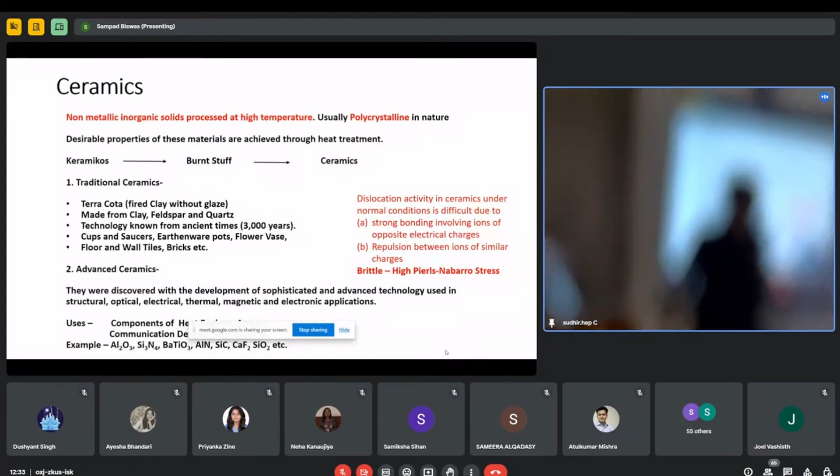So let me first tell those who do not know what ceramics is. I think everybody knows, but basically it is an inorganic material processed at high temperature. Now the definition of ceramics has changed, including carbon compounds like carbon nanotube, graphene, etc. Traditionally ceramics like terracotta were made from clay, feldspar and quartz. Those are traditional ceramics. Its technology is 3,000 years old. It's a very age-old process.

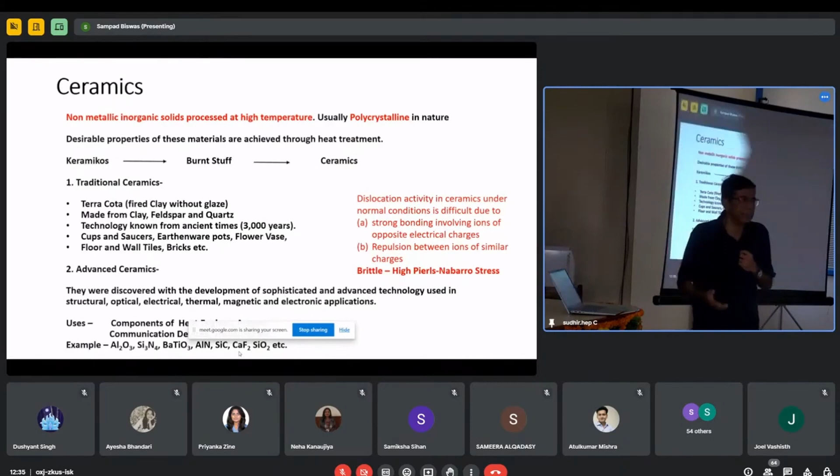But with the advent of modern technologies, you need materials beyond normal conditions. These are called advanced materials, and they are processed by advanced technology. These advanced ceramics are now coming into different applications, one of them is armor. These ceramics are aluminum oxide, silicon nitride, silicon carbide, barium titanate, calcium fluoride, silica. There are a lot of inorganic compounds you can make into ceramics by processing at high temperature.

Now, let us see how ceramics fail. If you take a ceramic and drop it, it will break. Its fracture toughness is very low. You cannot compare the fracture toughness of ceramics with metals or polymers. But even then, when a bullet impacts the ceramic, the bullet fractures. That is the most important thing. The bullet fractures and gets crushed. That is the reason why ceramics are applied in armor.

When the tip of the projectile hits the ceramic, it creates a conical shaped crack. These conical cracks are quite common under impact load and shock wave conditions. Shock waves are generated within the ceramic as well as within the projectile. The sign of the shock waves differs in the ceramic and the projectile, depending on the impedances of the two materials. Impedance means density and the velocity of sound waves within the materials. This is how ceramics fail.

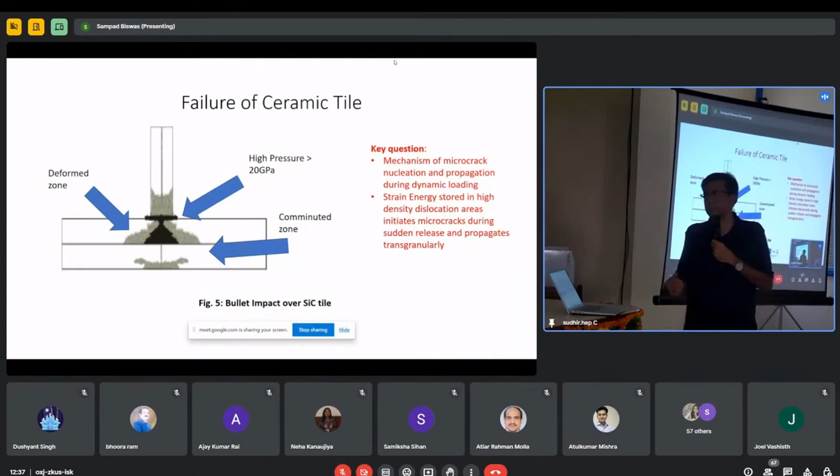Now, in the case of ceramics, aluminum nitride and silicon carbide are the main ones. These are the two main advanced ceramics occupying the state of ceramic armor materials. We have carried out a little bit of work on aluminum nitride.

See, aluminum nitride is a wurtzite crystalline lattice, a hexagonal wurtzite crystalline lattice, and it has very interesting properties. If you apply confinement load in aluminum nitride ceramics, what will you get? You will get a transition of the properties from brittle to ductile.

It's a very new invention, and people have found that when you apply this confinement load and then hit it with a shock wave, you get the transition from brittle to ductile. This brittle to ductile transition takes a lot of energy. It consumes a lot of the energy of the bullet, and it helps to protect against the bullet.

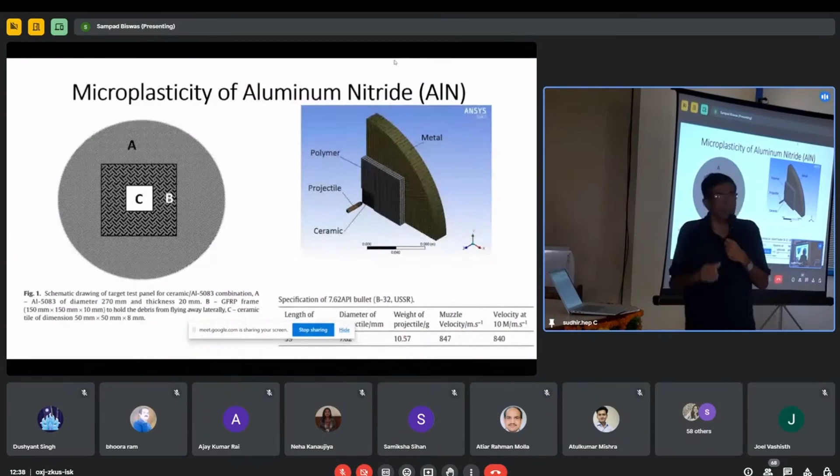So we carried out an experiment with two different ceramics. One is aluminum oxide, the other is aluminum nitride, and we wanted to see how this varies with the chemical composition of the ceramics. So one is AlN, the other one is Al2O3. These two have different crystal structures. One has a rhombohedral crystal structure, the other has a hexagonal crystal structure.

Our projectile was about 10.57 grams in weight, and it hit with a muzzle velocity. With a gunshot, you can change the muzzle velocity by changing the composition of the explosives. By changing the muzzle velocity, it can go up to a maximum of 847, and we did the experiment with the highest muzzle velocity of the projectile, about 847, which happens with AK-47 bullets. So that was our technical interest.

Now this is the target which we took. This target is made up of aluminum alloy A, on which we have placed a fiberglass material surrounding the ceramics. The ceramic is denoted by C. This C portion is hit by the bullet, and later on we modeled it in numerical simulations.

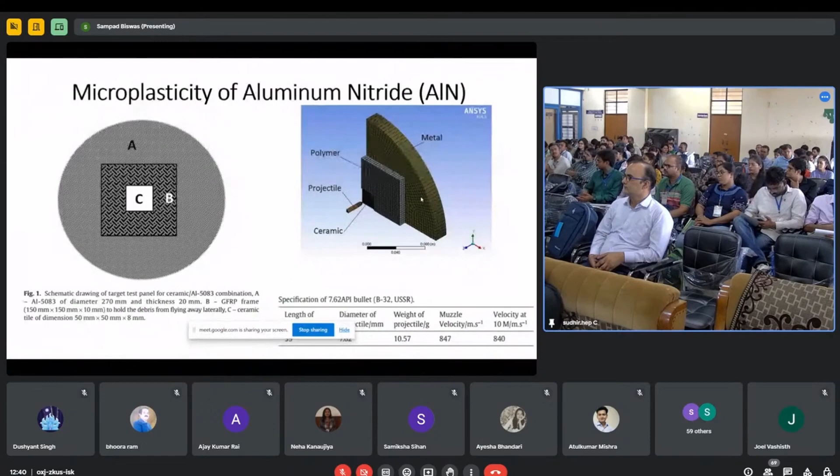Now what I wanted to show you is the projectile velocity: when the projectile hits the ceramics, its velocity gradually goes down. As it goes in, it breaks the ceramics, and at the same time its own velocity is going down. This can be experimentally verified, and it can be simulated as well. So we carried out the simulation work.

Then we looked at the microstructure of the impacted ceramics. As I told you, ceramics are very brittle in nature, due to the high Peierls stress. This brittleness is because ceramics contain dissimilar ions. While metals consist of similar atoms, in a ceramic crystal structure you get dissimilar ions.

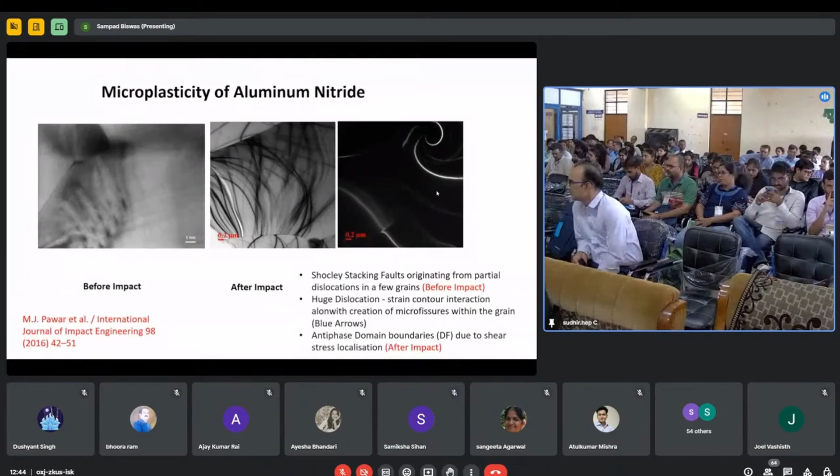You can see clearly the domain boundaries. So this absorbs a lot of energy of the impacted bullet. So this happens in case of aluminum nitride, which is prone to ductility at a considerable confinement pressure.

Next, another important ceramic is silicon carbide. Silicon carbide is a very interesting material, as well as aluminum nitride. It can be applied in a lot of applications. One of them is armor applications. Why is it so? It has got two crystal systems. One is wurtzite, which is hexagonal, and the other one is cubic, that is the sphalerite structure.

Now, in case of inorganic materials, what happens? You cannot just say hexagonal or cubic. You have to identify an analog for it. So here it is sphalerite, in the cubic lattice, and the other one is wurtzite, in the hexagonal lattice. So these are the two crystal systems of the ceramic. Apart from that, it has got different polytypes also. Polytypes means the stacking of the ceramic is different.

I'll show you later. Before that, I want to tell you that there are 200 polytypes of silicon carbide. The most common polytypes are 2H, 6H, 4H, 15R, and 3C. This 3C symbolizes the cubic form. The 2H, 4H, 6H are hexagonal forms. I'll show you how it happens and what the structures are.

Now, one important thing is that since these are covalent, the diffusivities of silicon and carbon within their lattice are very low. So you have to apply pressure, high temperature, and additives to prepare these polycrystalline materials. Now we are dealing with polycrystalline materials, not single crystal materials.

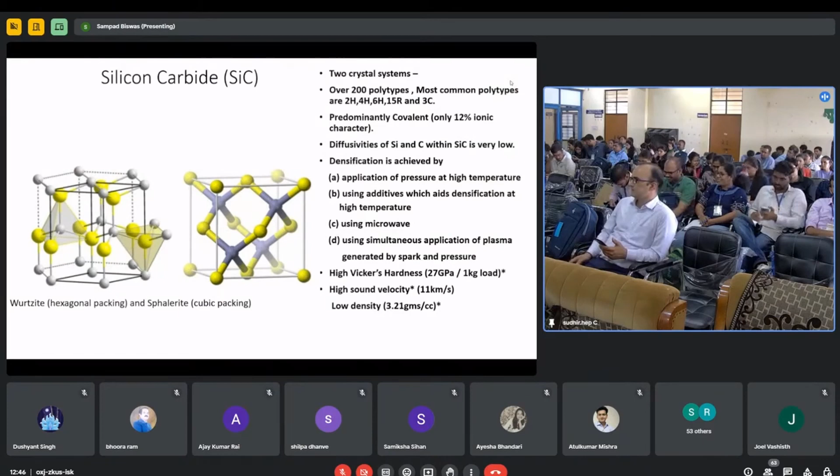So it has got a very high Vickers hardness, about 27 GPa at 1 kg load, and it has got a high sound velocity. That is most important: this high longitudinal velocity as well as transverse velocity within the ceramic. Solids have got much higher sound velocity. That is very important for armor applications. And it has got a low density, about 3.21 grams per cc.

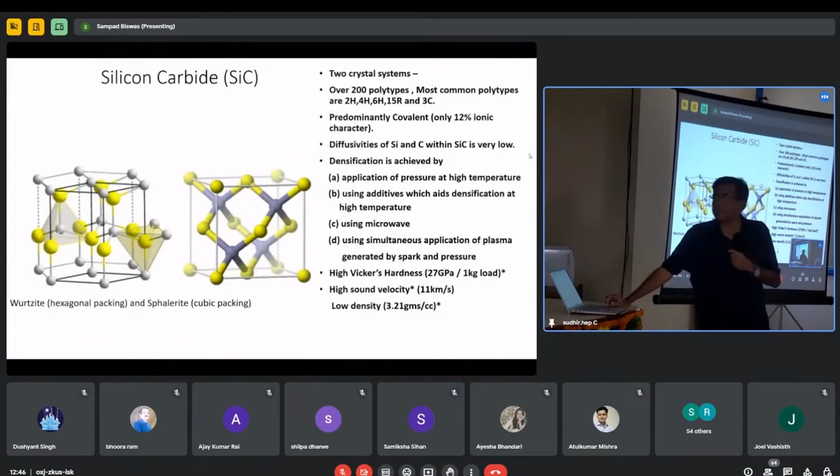Now, regarding the polytypes of silicon carbide, the properties also differ due to the different polytypes. So in these polytypes, what happens? It is the stacking of (111) silicon carbide bilayers, as well as (0001) of the hexagonal bilayer.

It has been found that during processing, you have to add some aluminum, boron or carbon within the material to get it densified to a maximum density, say about 98%, 99% relative density. And you have to add some metal ions like aluminum. What happens? This aluminum goes into the 6H structure, creates faults within the lattice, and converts it to the 4H structure. So this polytypic transformation is very important in silicon carbide ceramics.

So there is existence of Shockley stacking faults, and some have questioned whether the Shockley stacking fault is the only stacking fault, but there are Frank stacking faults also present in this material.

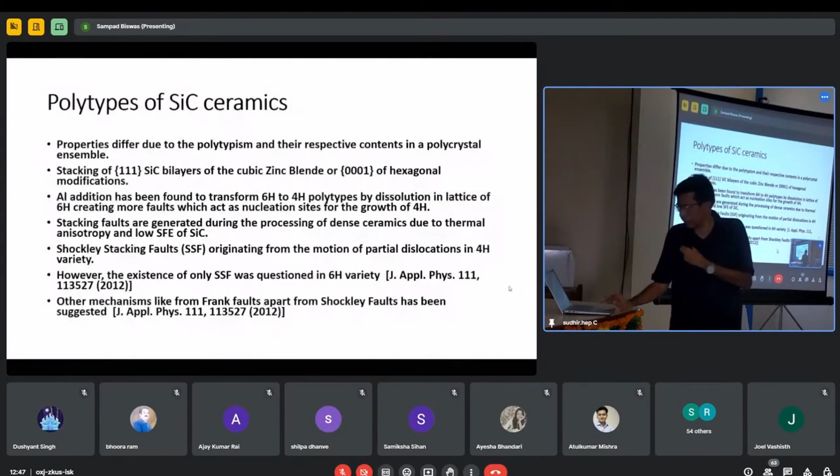Now let us see how the polytype structures are. You can see this is the pure 3C. These are the three stacking layers A, B, C. Then this is the 2H. Then this is the 4H, where you've got four layers. Then 6H, where you have got six layers, and so on and so forth.

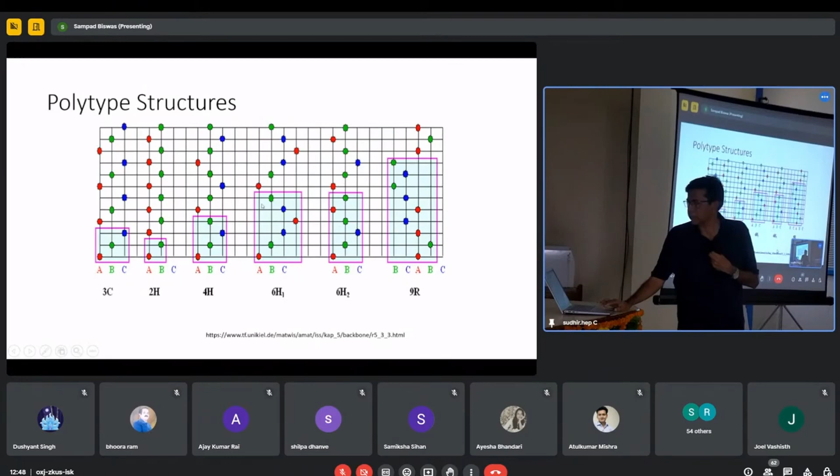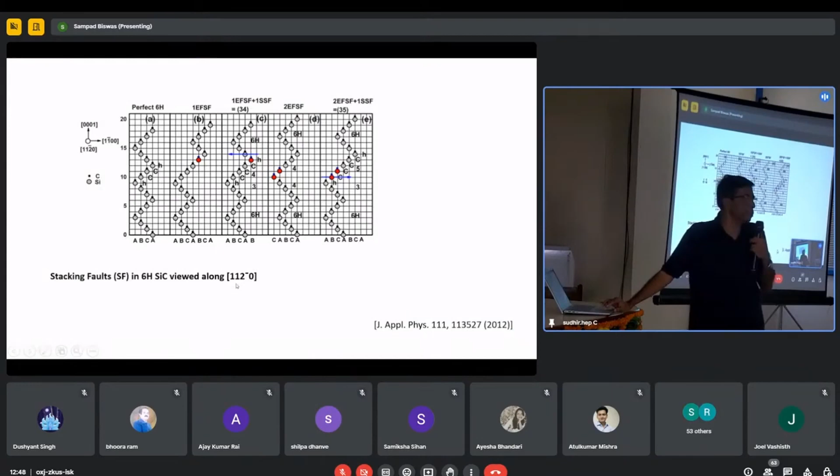Now, these are the stacking faults present in the 2H, 4H, and 6H structures. Here it is a case of 6H structures in the zone axis 1 1 -2 0 and the basal plane. I just wanted to show you how these stacking faults are in silicon carbide.

When we apply shock, as I was telling you, microplasticity appears. Microplasticity means the ceramic becomes more ductile, and this was first reported by some people like Longy.

Then some people have also analyzed the dynamic plasticity of silicon carbide during compressive loading. So these are the previous works I wanted to mention to you. So here what happened is that, lastly, some people have found that amorphization has been taking place. That means when you are hitting it with a bullet, when you are giving it extra shock pressure, crystalline to amorphous phase formation is there, and from there recrystallization also takes place. These were the mechanisms, and some people have observed it. We will also show you how it happened in our case.

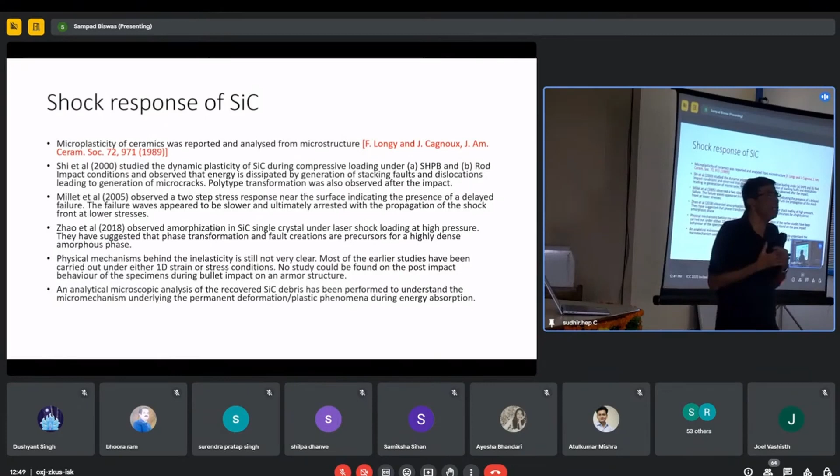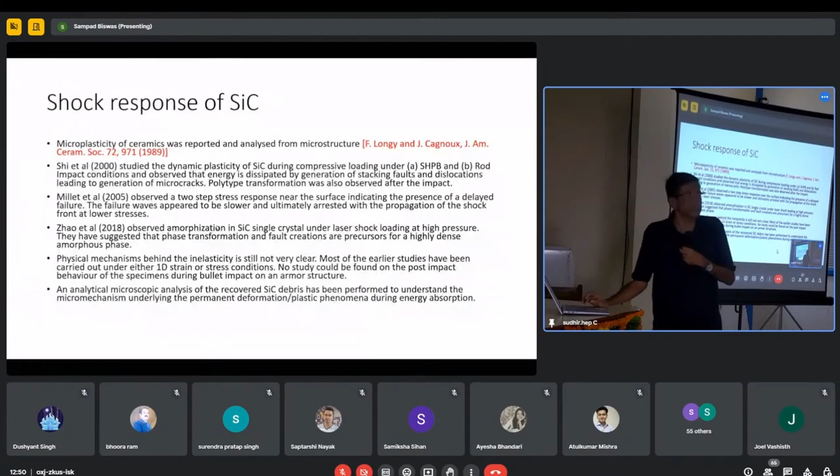So, the physical mechanisms behind the inelasticity are still not very clear. Most of the earlier studies have been carried out under 1D strain or 1D stress conditions, but in the case of actual armor, it is the multi-axial strain which plays a very important role. So we have carried out our experiments with an actual hit of the bullet, recovered the specimen, and then carried out further characterizations. This has not yet been done so far. We have not got any report from anywhere of anyone who has done this.

So we have taken the starting powder. If you look at the composition, you can find the 3C composition is only 5.5. Mostly it is 6H powder. So we have started with the 6H powders. Now, when we prepared the ceramics after sintering or hot pressing, what we have found is that the quantity of 6H is reduced while the quantity of 4H has increased. This is possible through a polytypic transformation from the 6H structure to 4H.

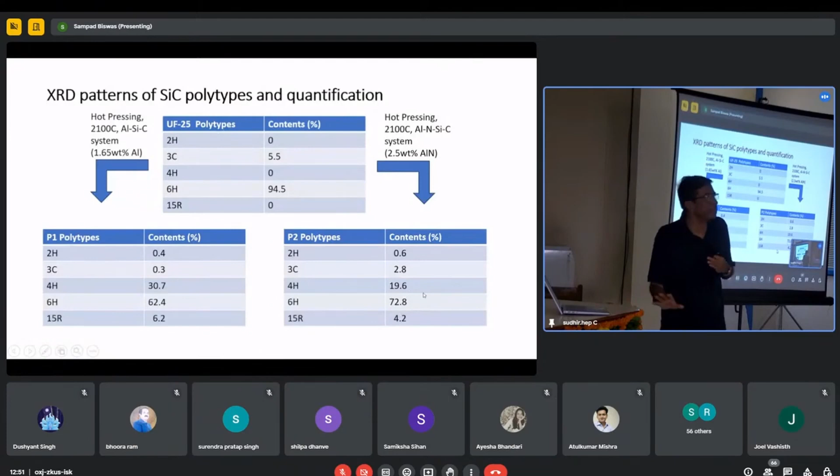And later on, in some cases where you add a different additive, what you find is that your polytype ratios are changed. In this case, you can find in the P2 samples, mostly the 6H variety is maintained, and very little transformation is there to 4H and 3C. This is the original ceramics I am talking about. Then I will show you how it happens after the impact with the bullet.

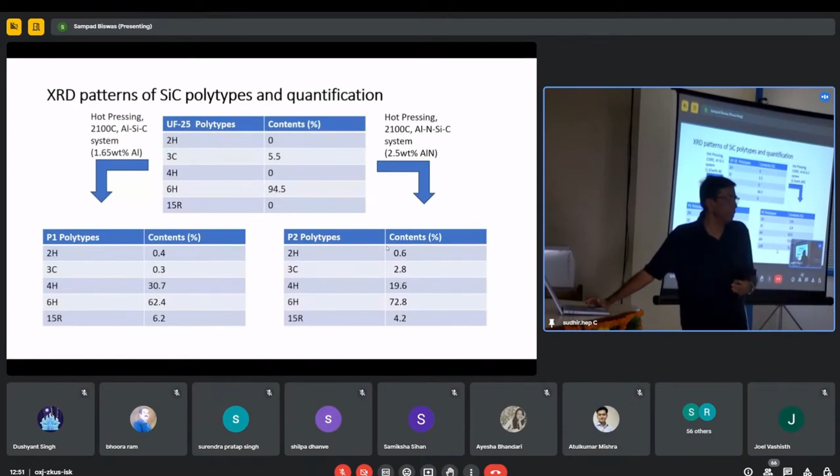Now, inelasticity of ceramics was first studied by planar shock experiments. Planar shock experiments means you apply a planar wave to the ceramics and then follow the response. And these responses are followed by means of a manganin gauge or piezoresistive gauges. And you will find the particle velocity, time, and you get a shock Hugoniot also. So Hugoniot characteristics are very important in the case of armor ceramics.

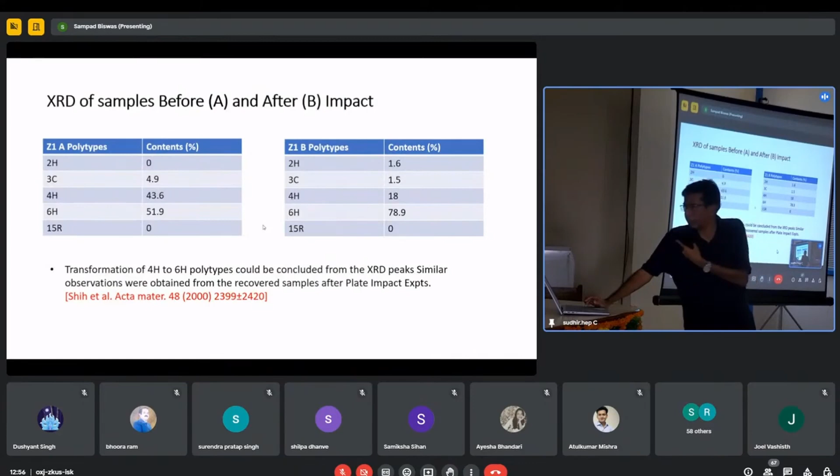And this observation was also made by some people earlier in the year 2000. So this is in case of another variety of silicon carbide. It is not only that, we will find another thing.

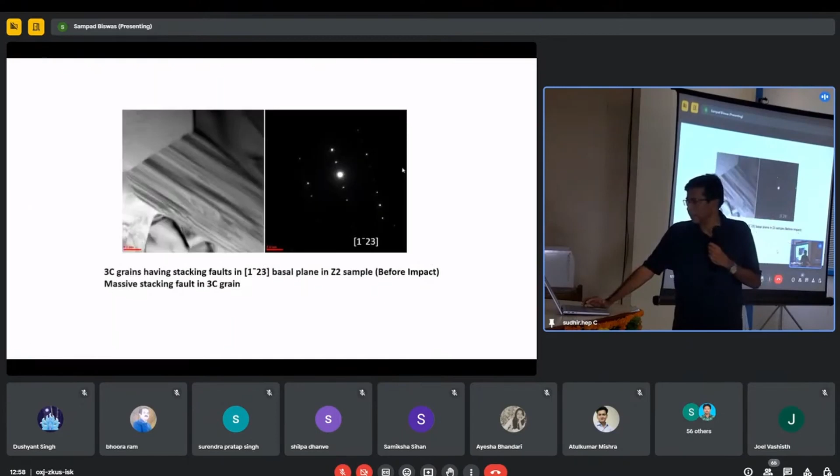What we wanted to say is that a lot of dislocation activity was there during the shock process, while these were in the plasticity region, and these dislocations create defects. See, if you look at it, a typical Shockley defect: one dislocation creating the defect here, another dislocation creating another stacking fault here, a third dislocation creating the third stacking fault here. This is a typical Shockley defect created by the dislocation and by the shear stresses applied to this material during the shocking.

So, the conclusion is that microplasticity with defect creation could be observed in the grains of both aluminum nitride and silicon carbide. Mainly Shockley stacking faults we could identify. We didn't find any Frank stacking fault or any other extrinsic faults. Antiphase domain boundaries could also be observed in aluminum nitride. These defects ultimately lead to micro fissures within the ceramic grains.

Tiny little crystals could be observed in the recovered samples. So, dynamic recrystallization is the main process of microplasticity, and this has never been reported until now. So, we are going to communicate it very soon.